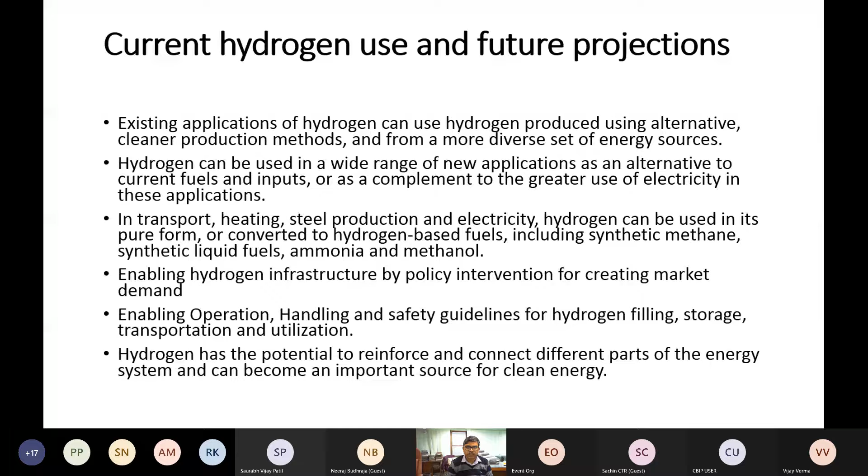Hydrogen is used in the refining of fuel to desulfurize it. That is the main application.

Similarly, in other sectors, one is ammonia production. Ammonia is used in many chemical processes, and the most favorable use is production of nitrogen-based fertilizers. So hydrogen is used as the basic raw material.

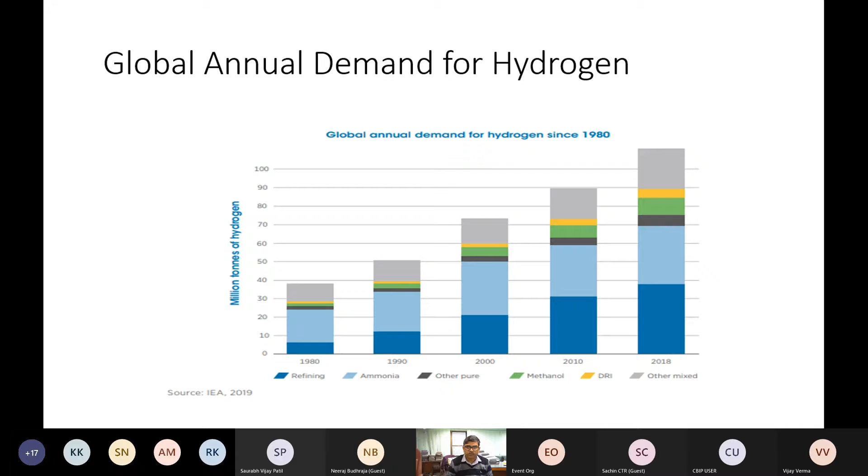Methanol production and other mixed uses. This shows that hydrogen is creating its own market, creating its own demand as the growth and development of other sources of energy takes place.

Applications of hydrogen as an energy source. Hydrogen can be used as an energy source, and it could be used for combustion directly.

For example, this can be used in fuel cells to drive hydrogen-powered transport vehicles, or as a means to produce synthetic fuels. I have already covered part of these synthetic fuels in the previous slide, so it is the same thing.

The main applications of hydrogen will be in manufacturing fuel cells, and an adequate size of fuel cells will drive adequately built vehicles. But for this, some changes in the motor vehicle regulations have to take place.

In power generation, hydrogen is one of the leading options for storing renewable energy. Hydrogen can enable renewables to provide an even greater contribution. It has the potential to help with variable output from renewables such as solar photovoltaics.

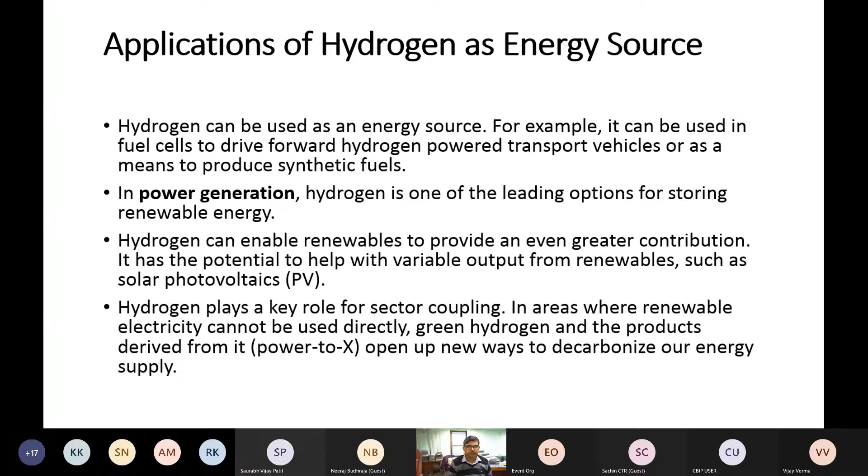This slide continues the application of hydrogen as energy use. Hydrogen can replace fossil fuels in some carbon-intensive industrial processes, such as in the making of steel or in chemical sectors, lowering greenhouse gas emissions and further strengthening global competitiveness for those industries.

It's basically a substitute for coke in the steel industry. Hydrogen is a reducing agent and can be used directly in the production of steel.

Many chemical and industrial processes depend on the use of hydrogen. For example, it is used as a base substance for producing ammonia, and ammonia finds many applications in other chemical processes.

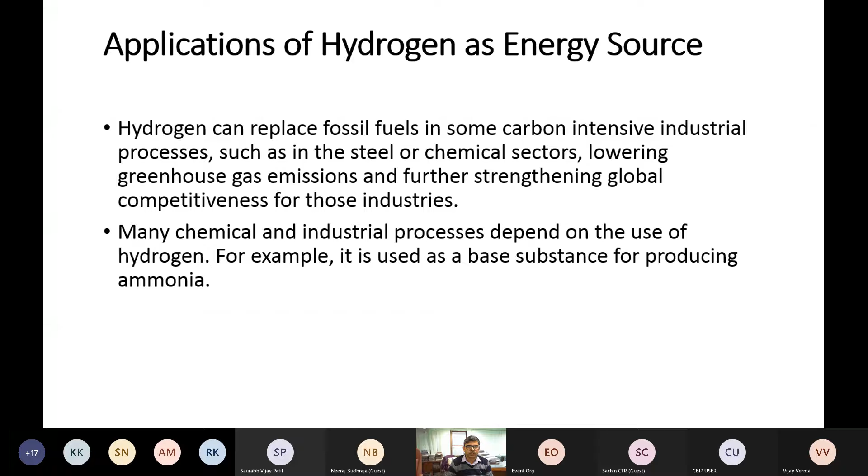Different types of hydrogen based on input material use. This terminology is quite common, so I felt it appropriate to refresh it - what is green hydrogen and what are the other forms of hydrogen.

So green hydrogen, for the understanding of the community in a uniform way, is one which uses 100% renewable generated power, and through electrolysis of water, the hydrogen is produced. That has been termed as green hydrogen.

But mainly when we have to produce hydrogen by the method of electrolysis, the availability of pure water, of adequate quality water, is a must. So it is water consuming as well.

White hydrogen is a byproduct of any thermal process. Turquoise hydrogen is thermal decomposition of methane. Gray hydrogen is natural gas plus any other process. Brown hydrogen is any fossil fuel plus any process. Blue hydrogen will be natural gas plus carbon capture and storage, or other CO2 reusage.

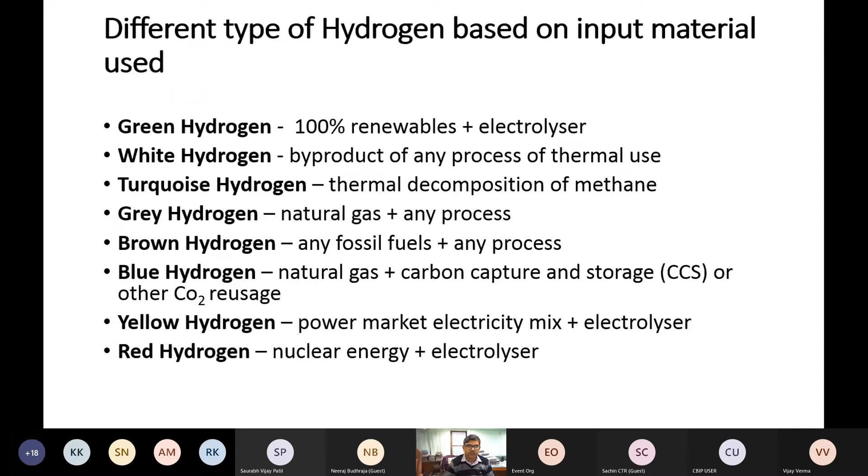electricity generated from nuclear energy is used, and electrolyzers are used along with that. Then comes another application and entirely new technology of hydrogen - fuel cells. Fuel cells are quite common, they have existed for a long time, but because they are expensive, they have not found application very easily. But it is expected that in future, with more research, economy of scale, and more safety assurances, the cost may come down and fuel cells will find better application in the power sector, in the form of distributed energy resources, as well as in the mobility sector.

A fuel cell is an electrochemical device that combines hydrogen and oxygen to produce electricity, with water and heat as its byproduct. Whatsoever byproducts there are, water and a little quantity of heat, they are not harmful to the environment, so it will help us in maintaining carbon neutrality. If the hydrogen has been produced using green energy or renewable energy, then it is basically a carbon neutral phenomena.

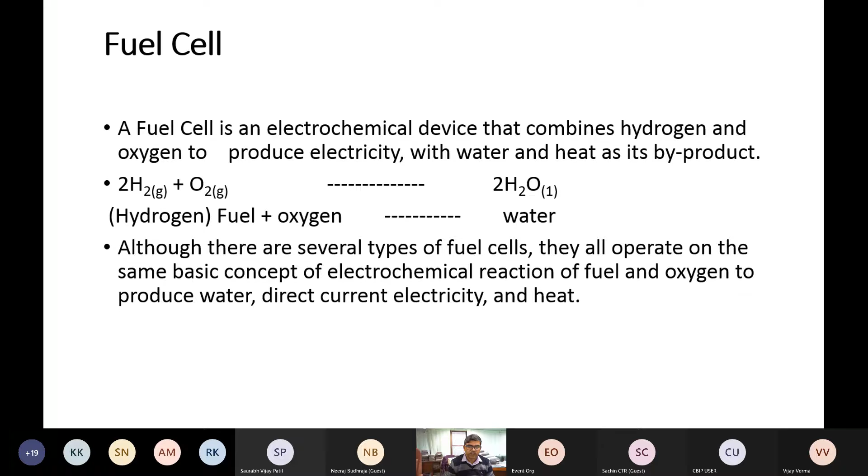Although there are several types of fuel cells, they all operate on the same basic concept of electrochemical reaction of fuel and oxygen to produce water, DC electricity - that is direct current electricity - and heat. So DC is obtained from the fuel cells.

Just to refresh, how does a fuel cell work? As long as fuel is supplied, a fuel cell will produce both energy and heat. A fuel cell consists of two catalyst coated electrodes surrounding an electrolyte. One electrode is an anode and the other is a cathode. The process begins when hydrogen molecules enter the anode.

The catalyst coating separates hydrogen's negatively charged electrons from the positively charged protons. The electrolyte allows the protons to pass through to the cathode, but not the electrons. Instead, the electrons are directed through an external circuit, which creates electrical current. So, to summarize, the hydrogen fuel cell produces electricity.

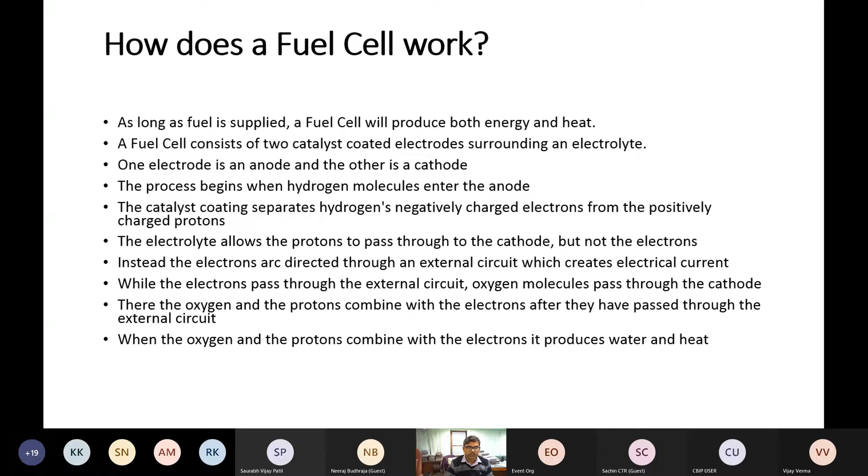Comparison between different storage technologies. As I mentioned in the beginning, there should be some policy. One of the policies is e-transportation and e-mobility, that is promoting the battery. The Energy Storage Mission aims at promoting storage technologies, including the pumped storage plant, which is a very stable and well established storage technique.

Another policy which is needed, or is in the offing, with work going on in this direction also, is on the fuel cell and the batteries. A very high level committee has been constituted in the Ministry of New and Renewable Energy, and other stakeholders are there. Naturally, CEA is also one of the stakeholders there. So all three technologies are independent of each other.

Here comes the policy making part. So what we are thinking from our side is that we treat all three technologies as independent of each other, each having its unique advantages and maybe some disadvantages, hence need to be promoted simultaneously. They should not come or act as a barrier to each other, so that we are not dependent on one technology alone.

Large scale dependency only on one technology alone does not help us in self-reliance and diversification of the portfolio, because if something fails, or some strategic raw material supply fails, we become dependent and we are in trouble. A specific application will decide the choice of technology adoption, keeping in view the techno-economic considerations - what are the resources, what the ecology says, in which part of the country we are operating, and what are the techno-economic considerations that will decide the application.

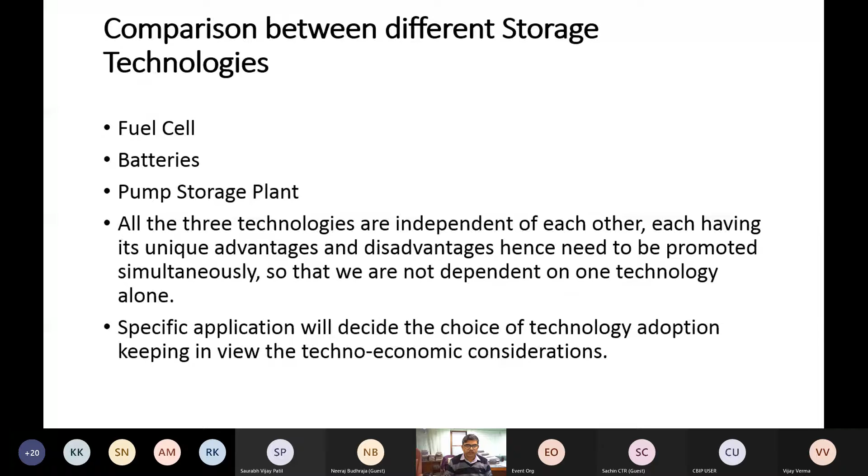Say, whatever is suited to the rural area may not be quite suitable to the urban areas or the metros. Then, to drive this, in how many ways can hydrogen be produced? So hydrogen production - this diagram depicts some of the things, may not be all - feedstock, production process, and the technology.

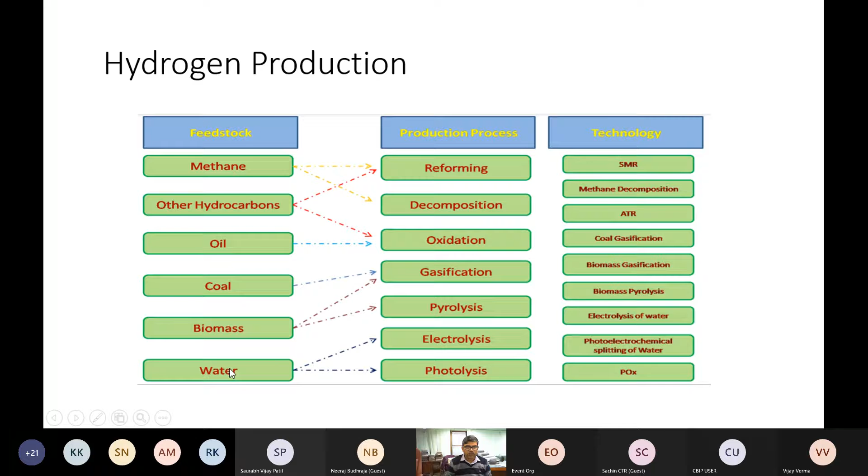Using methane, we can produce hydrogen by the technology of reforming, known as steam methane reforming. Similarly, other hydrocarbons can be reformed to reach hydrogen, or through oxidation of other hydrocarbons. Similarly, oil, coal, biomass, and water can be used. Water is processed through electrolysis and photolysis. These methods, along with water, will naturally use green energy or renewable energy as the basic input.

So there may be some expected barriers. What expected barriers are there? In the case of hydrogen storage, it offers a lot of advantages, but there are some basic barriers. One is the infrastructure requirement, another is safety, and refueling of vehicles running on hydrogen. They should be able to run over long distances, and there should be refueling stations at suitable intervals - hydrogen refueling stations, then fuel cell vehicles.

Another barrier will be the demand - whether the demand will be there or not, whether some alternative technology will surpass this. Then cost economics - how much is the basic cost, how much is the operation and maintenance cost and the running cost. We also have to see the international scenario, what international cooperation would be available, or if we become quite capable, we should be in a position to export the technology and the product.

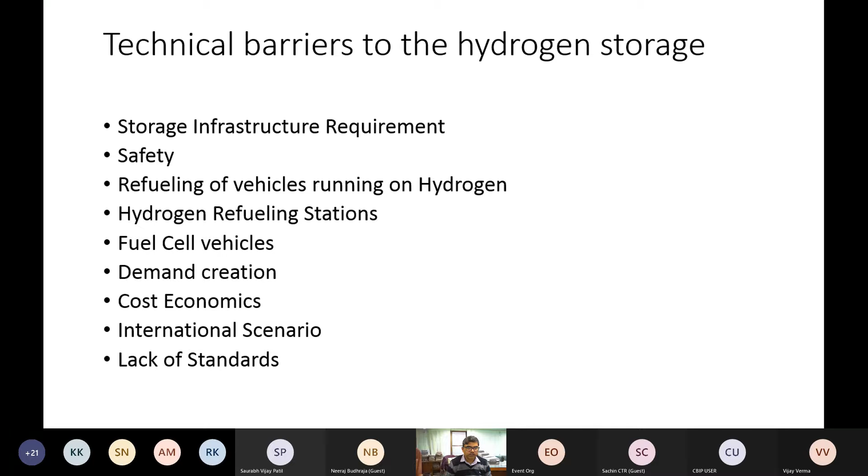But right now there is a lack of standards. This lack of standards could be overcome if we start early and make specific groups for that, taking all the stakeholders together.

Another issue will be the distribution of hydrogen, how it will be distributed from one place to another. Hydrogen can also be compressed. One is piped flow, in which it passes in the form of gas, and another is that hydrogen can be compressed and shipped in tube trailers at pressure up to about 250 bars. In India, it is allowed up to 2500 per square inch. Internationally, it is allowed up to 3000 per square inch.

Moderate quantities of hydrogen can be delivered to long distances in liquid form, but energy requirements and capital cost for liquefaction are much higher than for compression. Pipelines are used for long distance flows of hydrogen. The cost of hydrogen pipeline delivery depends upon the installed capital cost of the pipeline, as well as the cost of compression and storage at the production site. So huge investments are required in creating such infrastructure and pipelines, and special techniques are required for the compression of hydrogen.

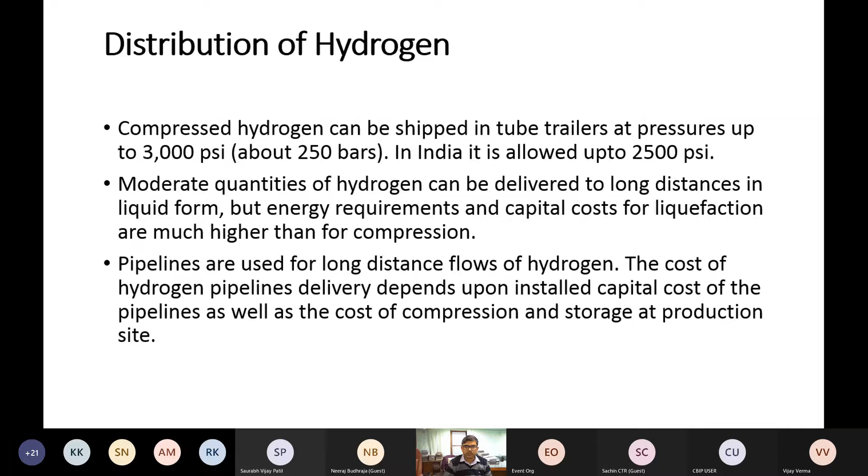So, use of hydrogen in transport. Whether hydrogen is being produced in a centralized or decentralized manner, there is a need to transport it to the point of use. The choice of the appropriate method depends on geography, the volume to be transported, distance of transport, and the end use application. Long distance and large volume hydrogen transport can be via pipelines and shipping routes, while local distribution can use either pipelines or trucks and trailers.

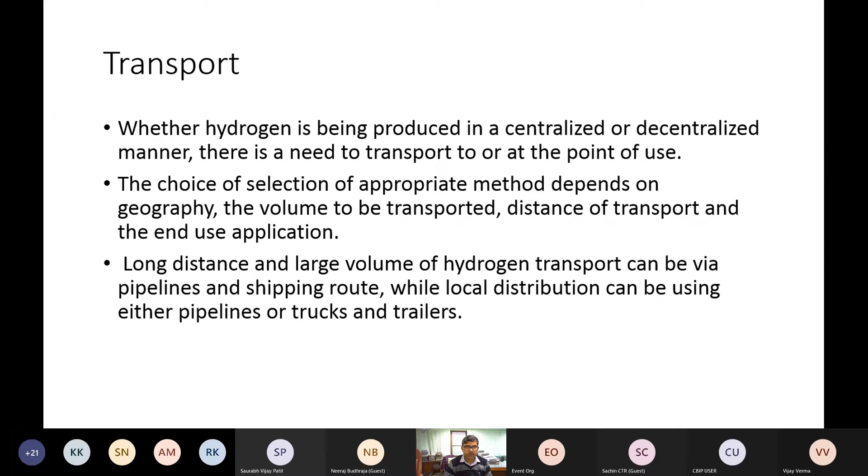Hydrogen requires safe handling. As far as handling of hydrogen is concerned, there are certain concerns. It requires safe handling while being produced, stored, transported, delivered or distributed, since it is flammable in nature. Leak detection is crucial to maintain safe handling. Standards related to hydrogen purity for fuel cell applications, pressure regulators, safety valves, pressure relief valves, and solenoid valves need to be formulated and adopted. We should be careful that whatever standards we make and follow are internationally acceptable, so that interchangeability requirements are also fulfilled.

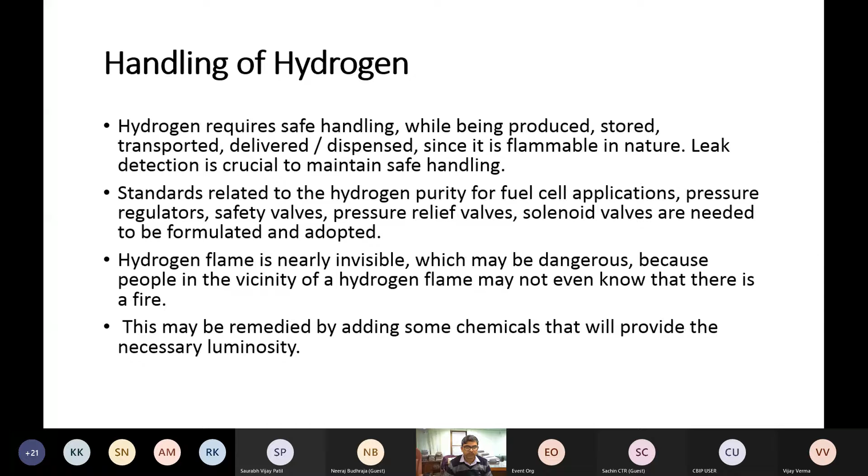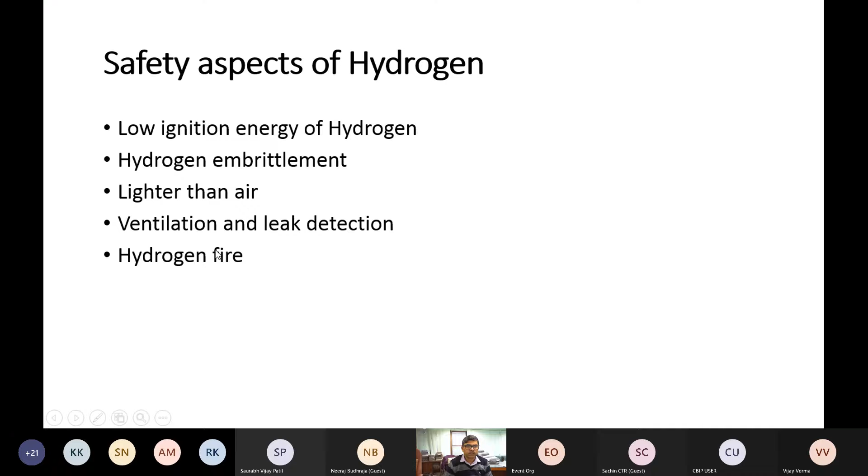So what is the Indian scenario while we are exploring and making efforts to proceed towards the hydrogen economy? There is an MNRE committee on hydrogen fuel cells which has held several meetings with stakeholders. Many organizations like IIT, BHEL, Mahindra & Mahindra, and Tata Motors have demonstrated hydrogen fuel cell driven, specifically designed vehicles. Various research groups in India, including BARC Mumbai, CSIR Labs, Institute of Chemical Technology, Chemistry Research Group, ONGC, and oil companies are engaged in R&D projects on development of hydrogen production in the country.

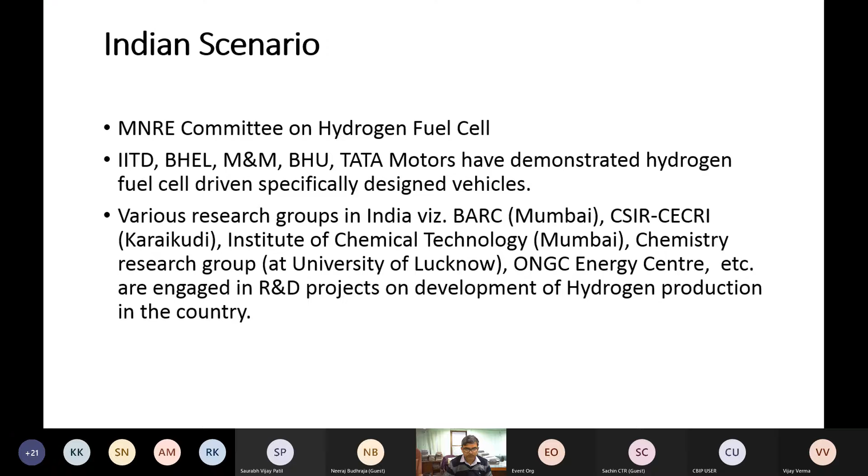Widespread use of clean hydrogen in global energy transitions faces several challenges. Today hydrogen is almost entirely supplied from natural gas and coal. It is already deployed at industrial scale across the globe, but its production this way is responsible for higher annual CO2 emissions, which need to be avoided. Producing hydrogen from low carbon energy is currently costly, however the cost of producing hydrogen from renewable electricity would gradually follow a reducing trend as the volume of economy increases.

Hydrogen must be used much more widely. Today it is used mostly in oil refining and for production of ammonia and fertilizers. For it to make a significant contribution to the clean energy transition, it must also be adopted in sectors where it is currently almost absent, such as transport and power generation. So our hydrogen development path should lead us to the use of hydrogen in transport as well as in electricity generation.

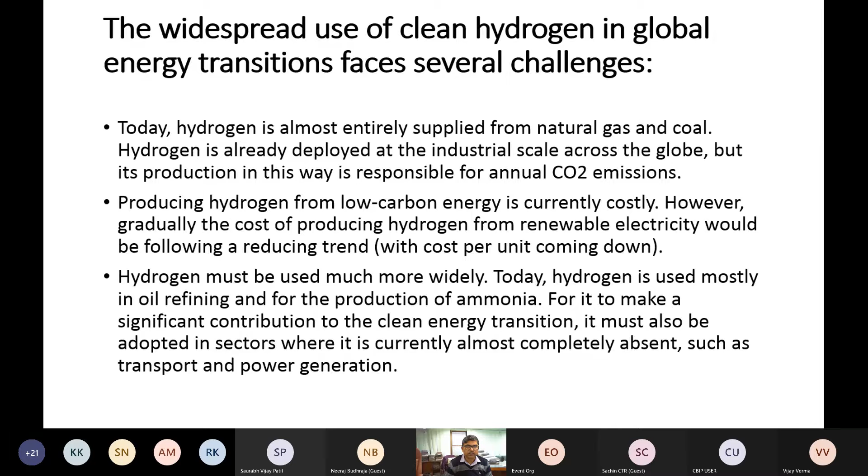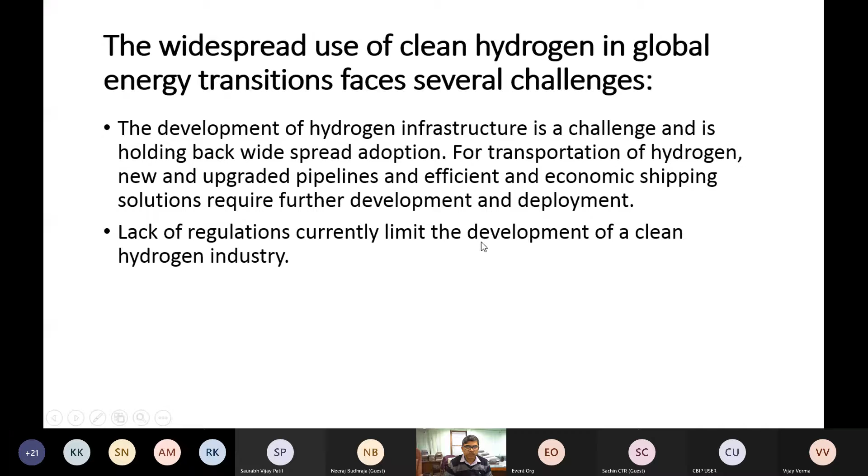Widespread use of clean hydrogen in global energy transitions continues to face challenges. The development of hydrogen infrastructure is a challenge and is holding back widespread adoption. For transportation of hydrogen, new and upgraded pipelines and efficient, economic shipping solutions require further development and deployment. Lack of regulations currently limits the development of a clean hydrogen industry, as regulations at present are not so mature, if they exist at all.

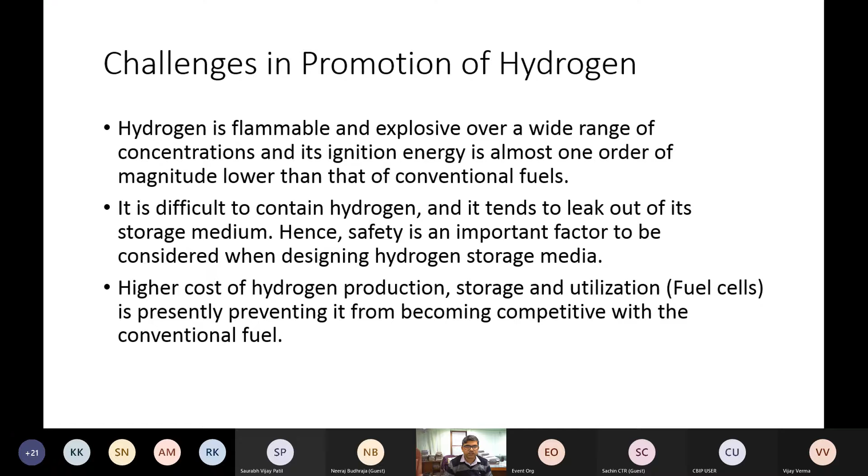Another challenge is that hydrogen is flammable and explosive over a wide range of concentrations, and its ignition energy is almost one order of magnitude lower than that of conventional fuels, so it easily catches fire. It is difficult to contain hydrogen and it tends to leak out of its storage medium. Hence, safety is an important factor when designing hydrogen storage media. Higher cost of hydrogen production, storage and utilization, such as in fuel cells, is presently preventing it from becoming competitive with other conventional fuels and technologies.

With commercial infrastructure, there are certain issues with hydrogen, and safety is critical due to its high flammability. Adequate safety equipment such as flame traps are required. Maintaining the quality of hydrogen through production is an issue. Low energy density makes vehicle range a problem. Leakage tendency of hydrogen is higher, and there is a lack of distribution infrastructure. Metal embrittlement, as mentioned earlier, requires frequent change in engine parts. Backfire and pre-ignition are some more technical issues.

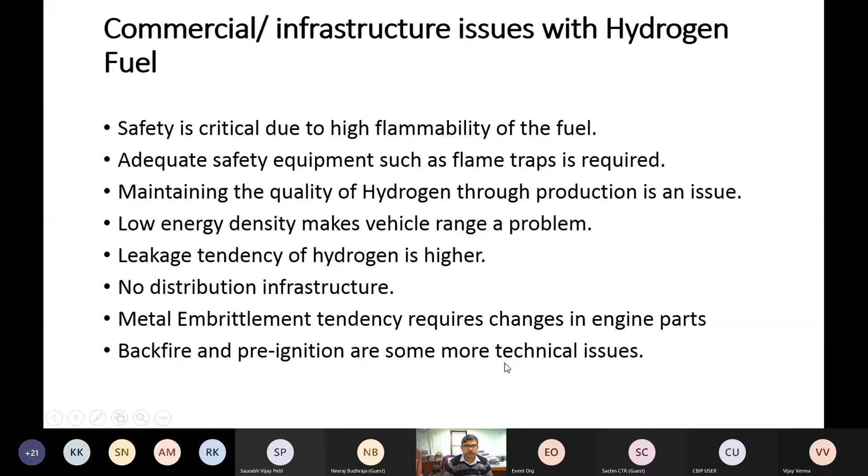So what recommendations could a group make? Recommendations could include establishing a role for hydrogen in long-term energy strategies. In the energy basket, it should find some place, and how much it should contribute must be targeted. So far, there are no targets set for how much the dependency on hydrogen will be, and in which sector hydrogen will be used at a larger scale.

Other recommendations: stimulate commercial demand for clean hydrogen. Address investment risk of first movers, those who come first face a great challenge of whether they will be accepted and whether they'll be able to recover their investment. Support R&D to bring down the cost. Eliminate unnecessary regulatory barriers and harmonize standards. Engage in international practice and track progress. Build capacity in hydrogen technology, along with research and innovations.

Before reaching the conclusion, I've got a few more slides. I will take just one minute to load that slide.

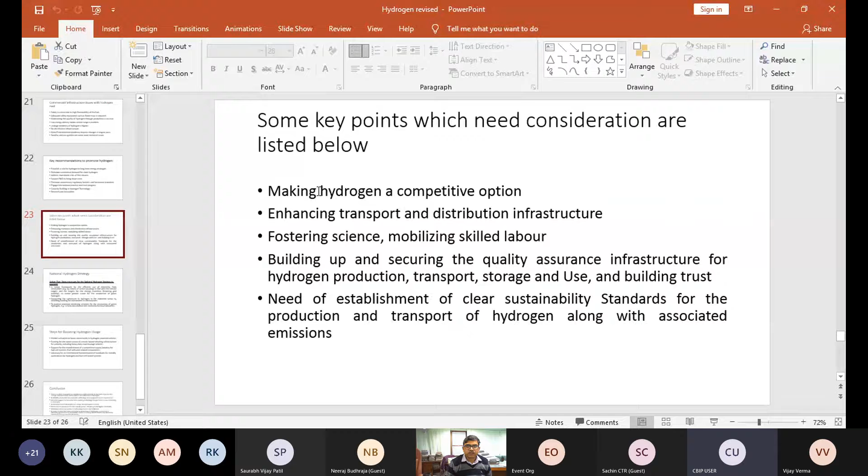Some of the recommendations have been listed in this slide. One, making hydrogen a competitive option. Because this is an era of competition, whatsoever the energy technology is there has to find its place on its own based on market forces.

The correct example of this is renewable, particularly solar. When it started in 2010 or so, the prices per unit were quite high. But now, because of the economy of scale and other factors and the improvement in technology, the price has come less than even the thermal conventional power.

Enhancing transport and distribution infrastructure. For hydrogen to be in place, we have to develop the infrastructure because it's a new sector. So it happens with everyone.

Suppose if we want to lay a new railway line, that will need an investment into the untouched area. Similar will be the position for this. To establish hydrogen, a huge or sizable investment will be required to create the basic infrastructure.

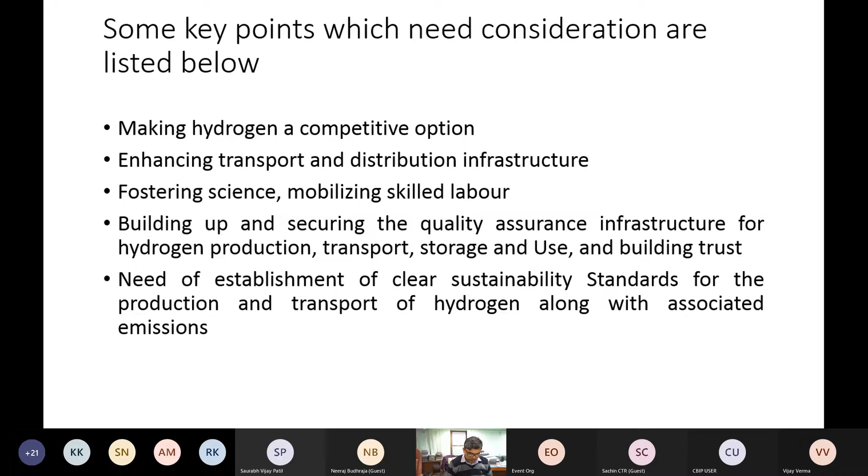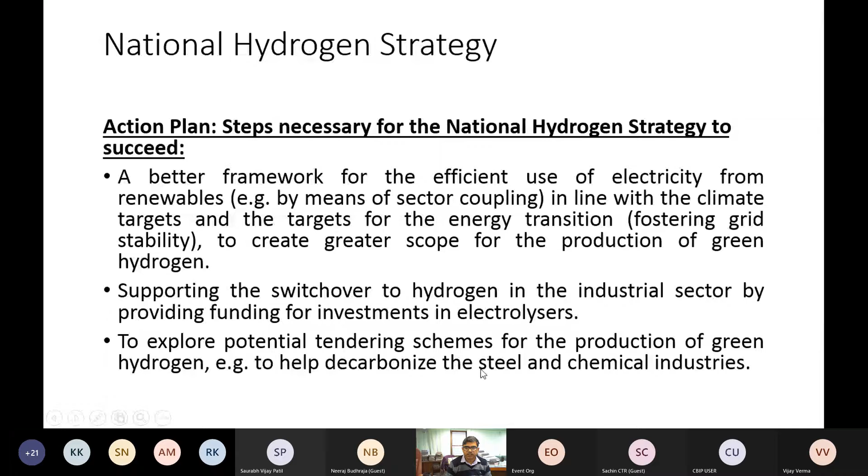Supporting the switchover to hydrogen in the industrial sector by providing funding for investment in electrolyzers. Maybe there is a need to subsidize the electrolyzers in the beginning so that the market takes place. Explore potential tendering schemes for production of green hydrogen, to help decarbonize the steel and chemical industries.

Steps for boosting hydrogen usage. Market activation to boost investment in hydrogen powered vehicles. Funding for the construction of need-based refueling infrastructure for vehicles, including heavy duty road haulage vehicles.

How it will be transported - wherever needed, say if hydrogen has to be transported to remote villages, then we have to build suitably sized or smaller sized trucks, not the long haulage trucks.

Support for establishment of a competitive supply industry for fuel cell systems, that is fuel cell related components, whatsoever accessories and components would be required for storing hydrogen and other safety devices for handling it. Advocacy for an international harmonization of standards. This is very much important for mobility applications for hydrogen and fuel cell based systems.

Basically this harmonization means, like mobile chargers are a typical example - they are not uniform. You purchase one brand of mobile, or one type, and its charger may not fit exactly into another brand of mobile. That should not happen. There should be harmonization and total 100% interchangeability of the components.

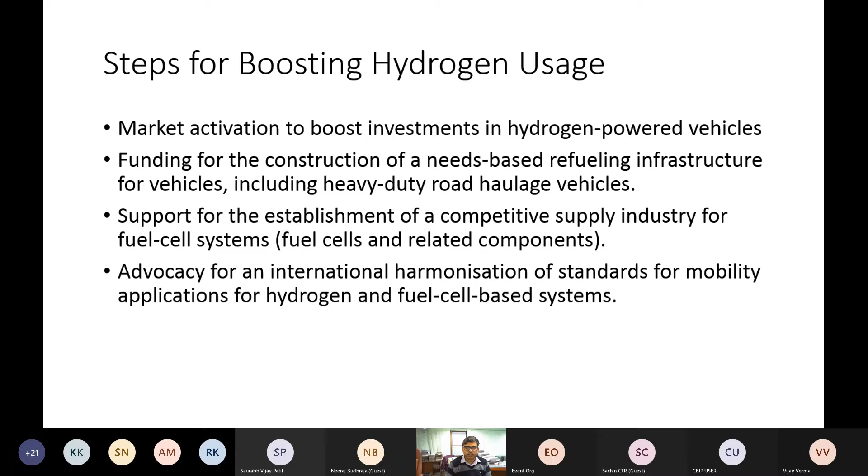Then if you allow me, we can come to the conclusion and read out this conclusion from here.

There is a need to provide due emphasis on R&D activities in the field of production, storage, transportation, safety aspects, and utilization of hydrogen. So here again, safety is the foremost.

Availability of requisite raw material, technology and equipment needs to be ensured on a long-term basis. Like batteries are there, and the trend is towards lithium ion batteries at present. Of course, other technologies are also being developed. But if you take the position of India, India does not have lithium reserves.

Other reserves are said to have been occupied by other countries. So it becomes a strategic material, and it becomes a strategic decision and choice whether we opt for mass scale applicability, mass scale e-mobility programs using lithium ion batteries. That is a point to think over.

Financial support for transition from existing technology and practices to new technology is necessary. Financial support will be required. Some new business models should come. A roadmap needs to be prepared to adopt the hydrogen economy. It is basically proper planning driven from the center level.

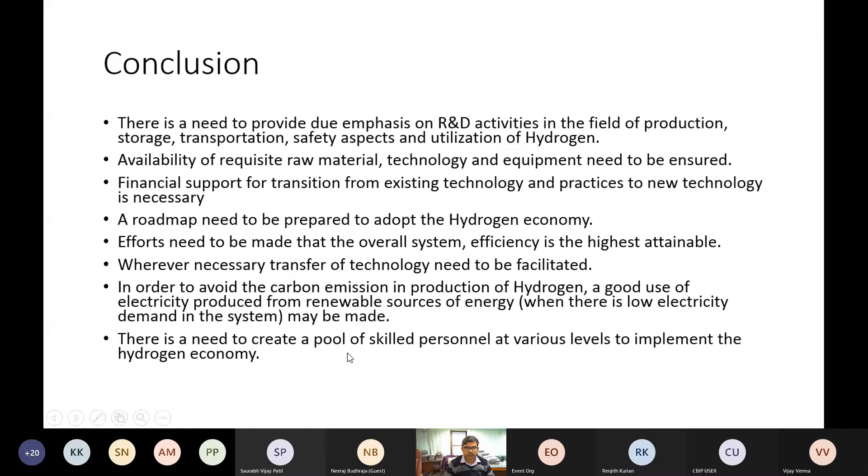There is a need to create a pool of skilled personnel at various levels to implement the hydrogen economy. So I think let me stop here. These were some few slides and few points which I wanted to express myself in this August gathering. Thank you.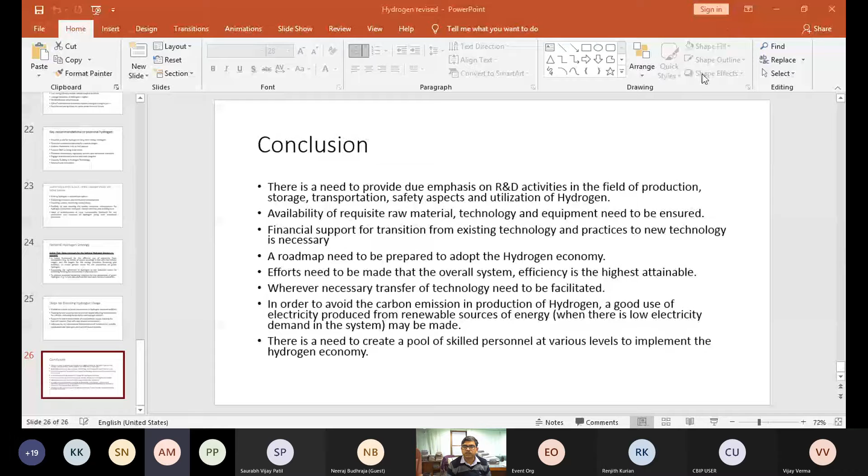Good afternoon, sir. This is Dr. Sagar. I am calling from L&T. Sir, one of the concerns which you expressed is actually lack of standards, which I agree with. My question is, sir, hydrogen is known to us since we are producing or separating it from fossil sources, and we are also handling it for various processes. So what are those specific standards which need to be developed?

Actually, standards need to be developed. First of all, we can adopt the international standards, whatsoever are available. And then we develop standards which are specific to India, particularly keeping in view the typical climatic conditions - extremes of weather. One is the very cold climate, say in Leh Ladakh, and very harsh climate particularly in Rajasthan and northern plains, with high ambient temperature. So those should take place.

And for this, India is participating in various committees of international standard-making bodies such as ISO. These committees are developing global standards for hydrogen which could be adopted in the future by India. In parallel, the BIS Committee on Hydrogen Standard is working towards developing Indian standards by adopting international standards with modifications for India-specific conditions.